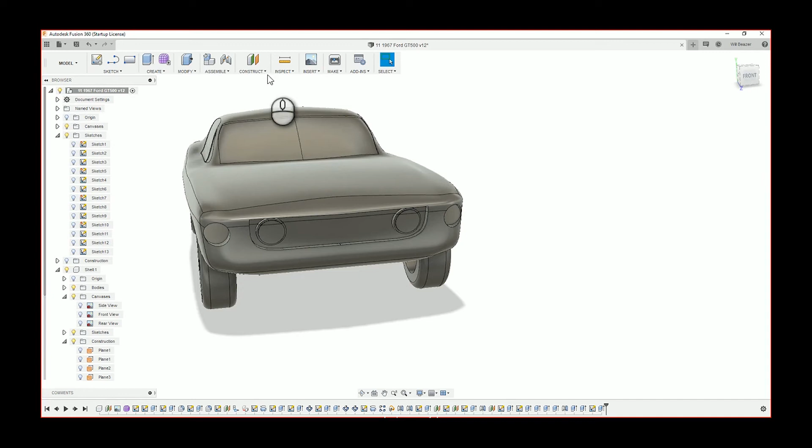Hello, and welcome back to what I believe to be part 16 of modelling a Mustang in Fusion 360.

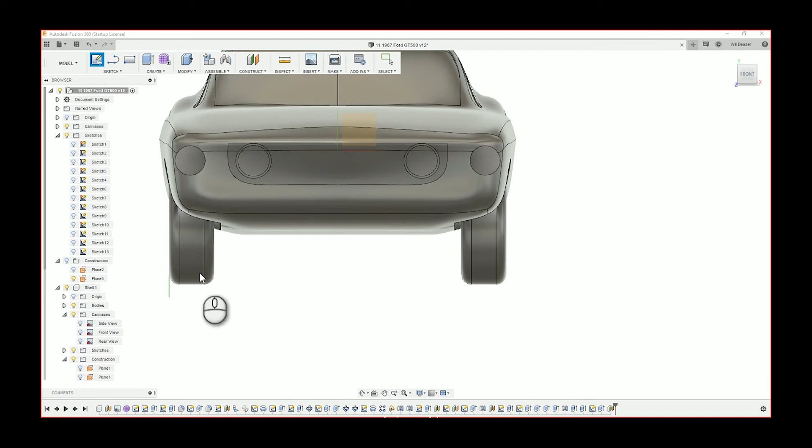So we're going to begin this episode with a standard bit of stupidity that I have since learned from. For some reason that I'm struggling to kind of come to terms with, I draw the headlights from side on. I should be drawing from this view that we're in currently, just because it would be a lot easier. But instead, I just decided to draw from side on.

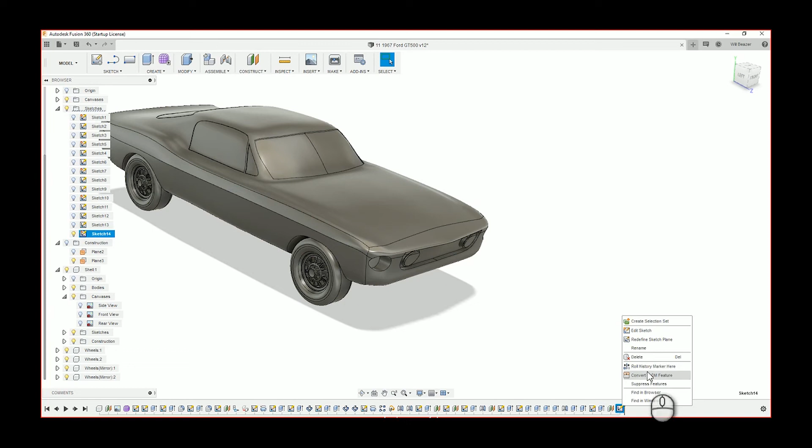What we're trying to create here are the little kind of dome headlights that fit in the sockets we cut out last time. So at the front there are kind of the central headlights, and then if you look close, there's those outer sockets we cut in. And if I decided to draw straight on from the front view, I could have just selected the surfaces that the cut extrude is done on as my sketch plane, and I could have drawn a very quick shape and edited that, no problem. But instead, I decide to draw it from side on.

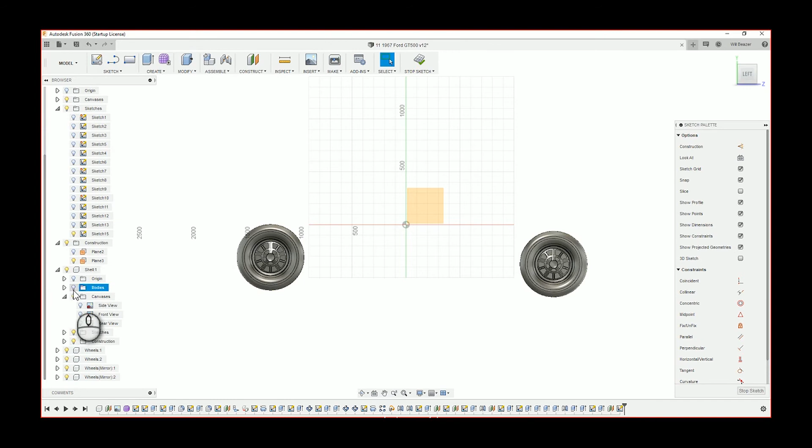So yeah, what I want to do here is I want to use that surface and project it using the project tool, which I've bound to the letter P, but you don't have to. Actually, I think that might even be standard. So now I have that circle shape, and what I want to do is create an axis, basically, for my sketch to revolve around.

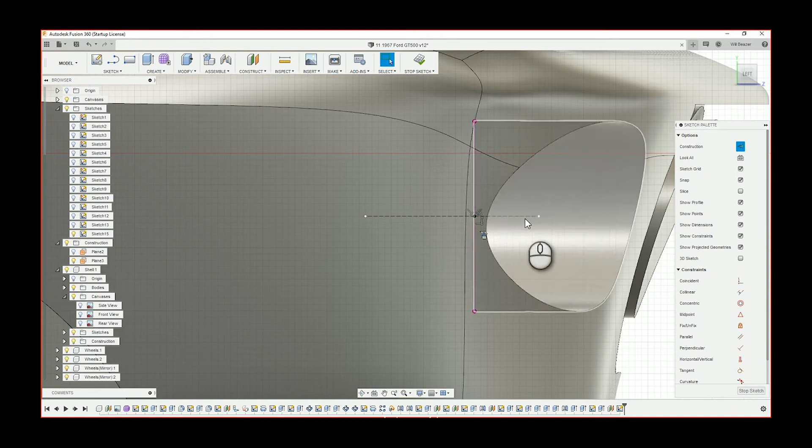A quicker way of doing this axis would actually be to go into the construct tools at the top and then axis through cylinder. So if you select that, construct axis through cylinder, and then select that circular cutout space there that keeps flashing, then an axis will automatically be created. But instead I've drawn a line and a profile, and I'm going to revolve it in this direction. I guess the one advantage of drawing it on this angle is it's quicker to edit how much I want the dome to kind of come out. But you'll soon see what I'm trying to do.

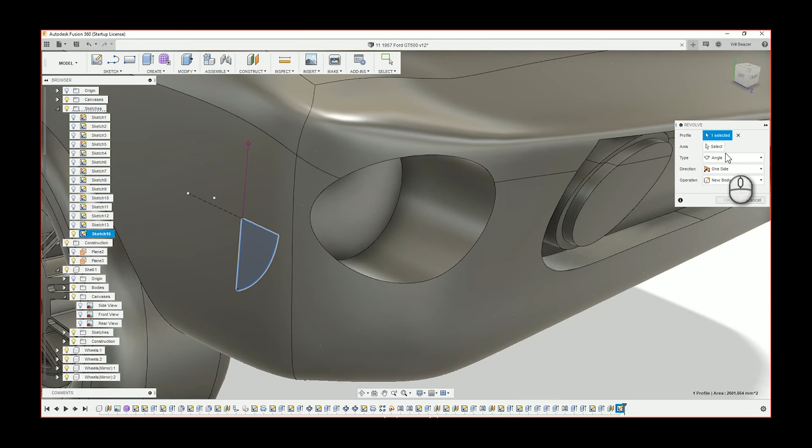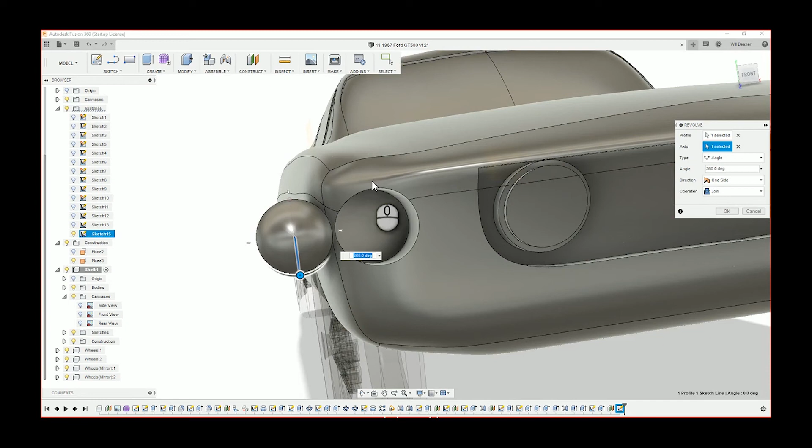Here, it's currently on the cut tool because obviously, I'm sketching on the wrong plane, and what I should really do is just go back and select the right plane. So instead, I click join, and yeah, I should realistically be changing the sketch plane before I do this, just because it might create more errors than are needed. So the plane that I actually should be sketching on, I created in the last episode right at the end, just by using the construct and offset plane tool to the middle of the headlight, basically.

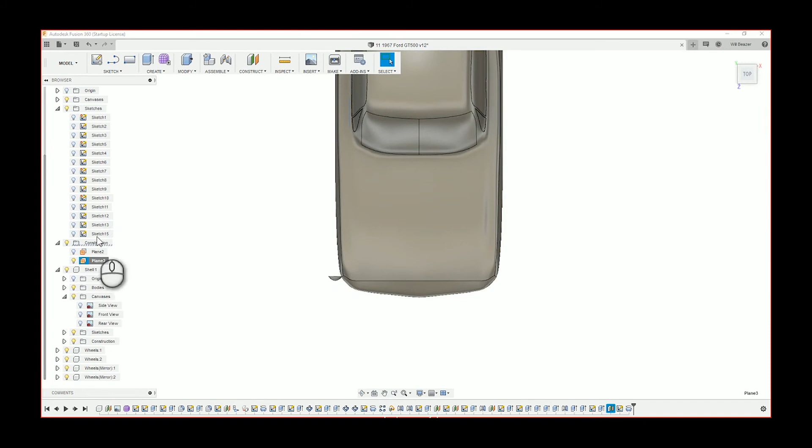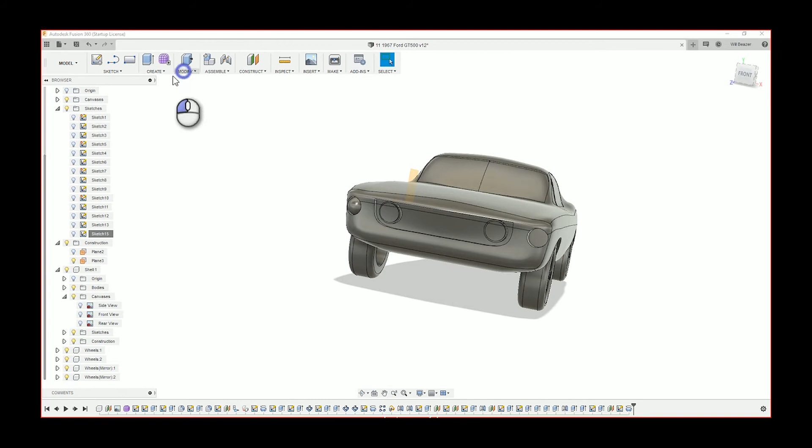So now, because I'm sketching on the wrong plane, I want to redefine the sketch plane, and then I want to find the sketch plane that I actually should be using. So I believe that's that one. And now if we come back to the front, there we go. Dome fits in the socket perfectly. So admittedly, the chronology of the steps I just did there was quite bizarre. I did end up with what I wanted to achieve, but I would not do it in that order.

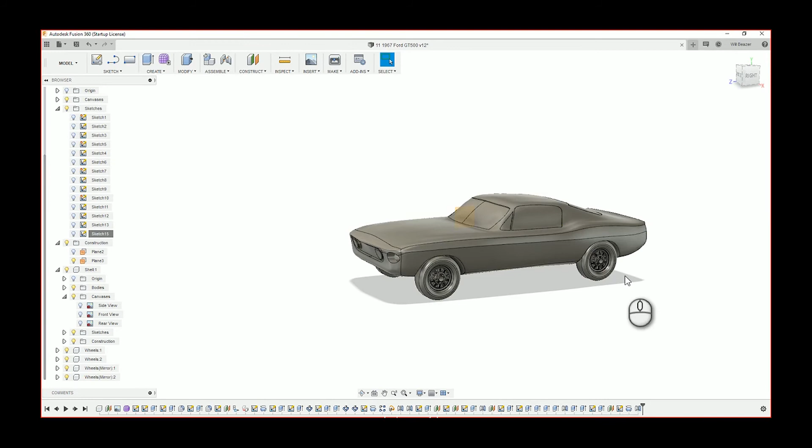So now quickly just mirroring the new feature across. It might be worth noting as well that usually it's easier to mirror features that are new bodies and not joined bodies, because what you can be doing is selecting the whole car and mirroring it, and then having two cars in exactly the same place. So what's it called, like overlapping geometry, and that can cause problems for things like CNC machines. So yeah.

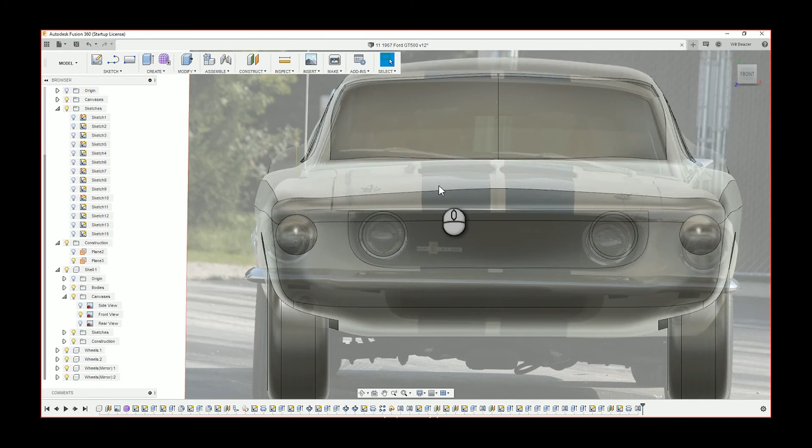So after a quick look over the car, I'm kind of deciding what's next to be done. So what I want to do is create that little air intake at the bottom. The reason why is because I know it's just going to be a simple, quick thing to get done. And I use a pretty similar process to what I did for the grille at the front. So I want to find a plane that's outside the car. You don't have to. I've just always found it easier to do it like that. So create a sketch, and then

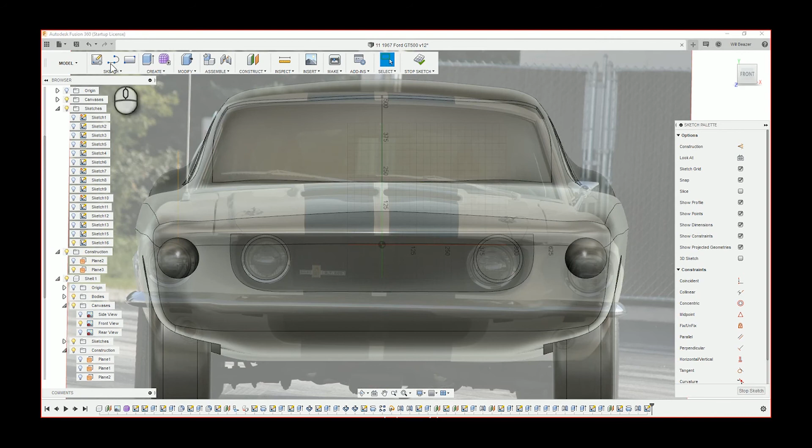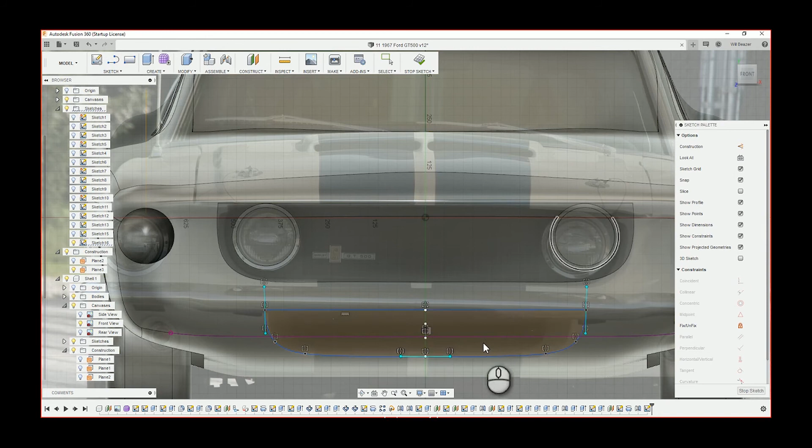using the line tool and the fit point spline tool, I'm able to create that shape. So I've only drawn it halfway because I want everything to be symmetrical. So then I'm just going to mirror it across. So select the sketch entities, mirror them to create one whole profile, like so. And you can tell it's a closed profile because of the orange glow when you hover over it.

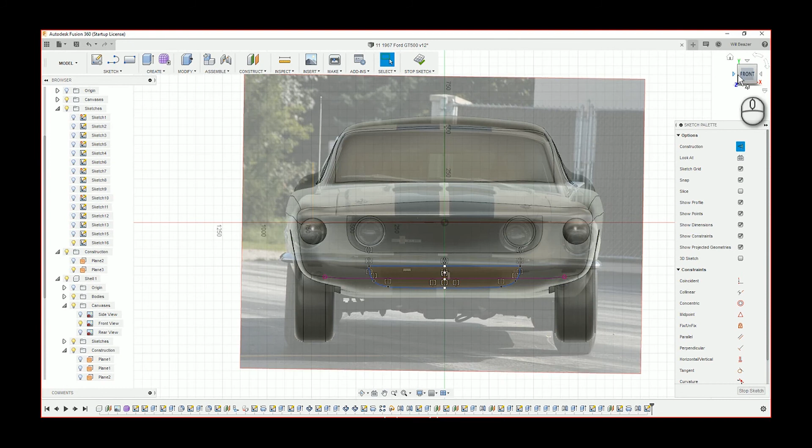So now what I want to do is extrude that into the body. I've projected that line from the body off of it as well, to do the same thing I did with the grille. So with the grille, I've got that kind of line that cuts through it near the top part of those headlights, and I had to do that because I wanted the way it extrudes to match the body. See from here, I've gone from object rather than extruding from the plane, and basically I wanted to make the air intake at the bottom consistent with the grille above it. So I'm using it off the body.

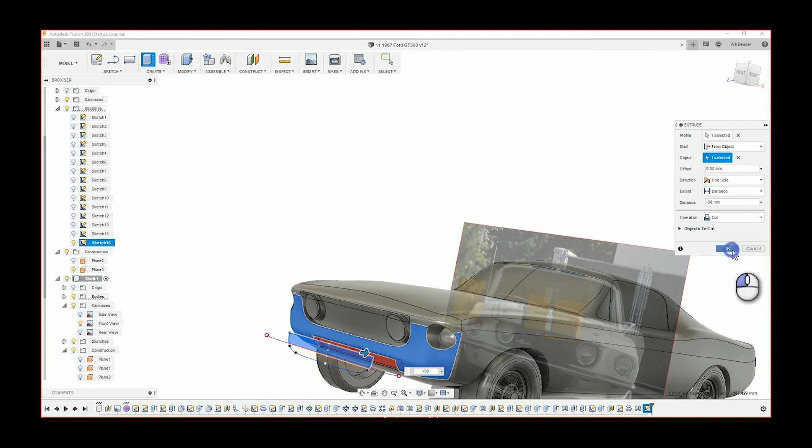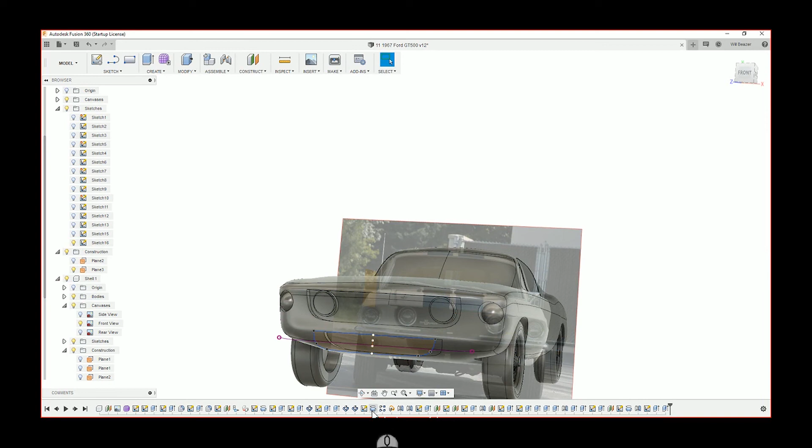Whereas when we did the kind of outer fog lights, headlights, whatever you want to call them, that was just a plain cut extrude. The start point wasn't from the body. It was just from the sketch plane. So you can see how the cut goes 50 mil deep, but 50 mil starting from the body, so it follows the curvature of the car. But I'm sure you'd have picked that up on an earlier episode, but just in case you weren't clear, there you go. That's the lower air intake done.

So I'm going to quickly hop into the display settings, click visual style, and then I'm selecting shaded, so that gets rid of all the lines. I want to see the Mustang without the black lines.

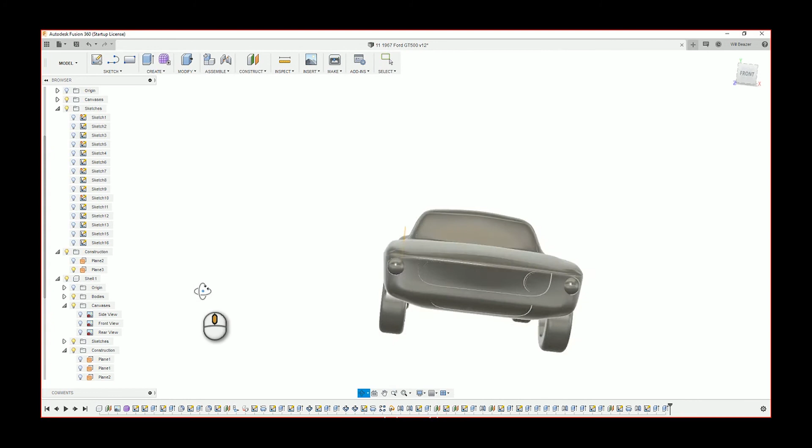Personally, I can't work in the shaded mode. I find it very frustrating to just work in this mode. But on fluid shapes like this car, I like to see how things are going by toggling the visual style between shaded and shaded with edges. Some people can work fully in shaded. I'm not one of them.

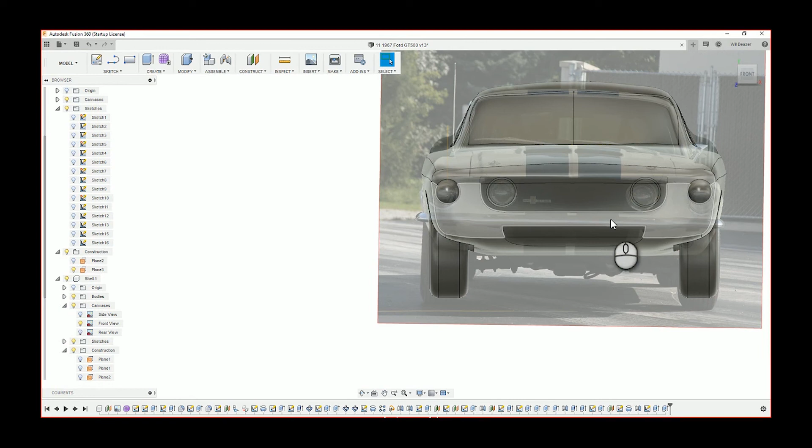So now we're going to move on to the bumper, the front bumper. I'll preface this by saying, partly down to how late it was in the work I was doing, because I did this all in the same day, I find this so difficult. It's not a difficult thing at all, it's a rather simple shape, but sometimes I think of how I would do things on SolidWorks, my previous program, and then I just try and do the exact same thing on Fusion. Sometimes that works fine, and sometimes it doesn't. In this case, it wasn't.

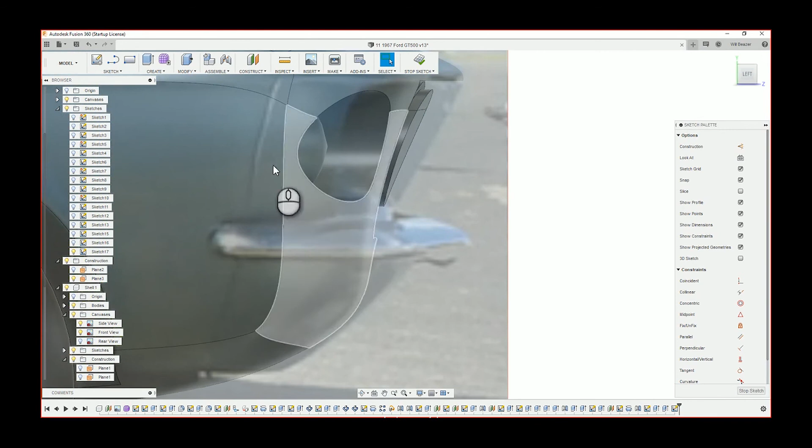This is a case of something that's obvious on SolidWorks, but it's only down to more experience on the program.

But there are a few ways you can do this. You could do this via a sweep or a loft feature. So what I'm doing is creating a profile of the center of the front bumper. Obviously I can't see the cross-section, it's impossible to know the exact cross-sectional analysis of the bumper unless you own one that you've cut in half. So that's just an educated guess for what the profile would look like right in the middle of the bumper.

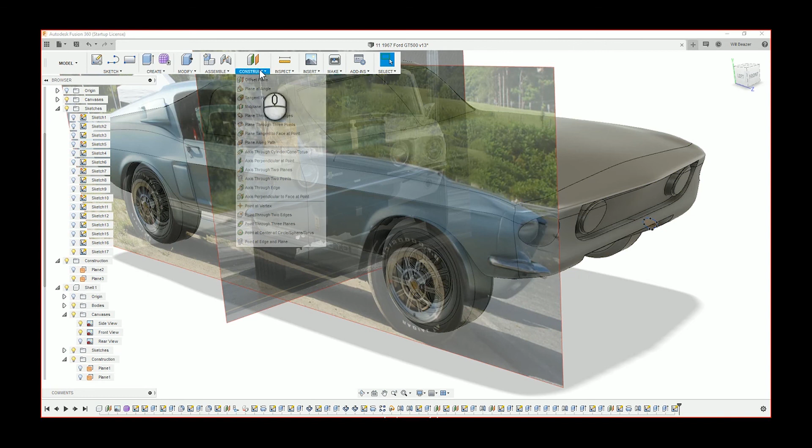And the same goes for the next sketch I'm about to do.

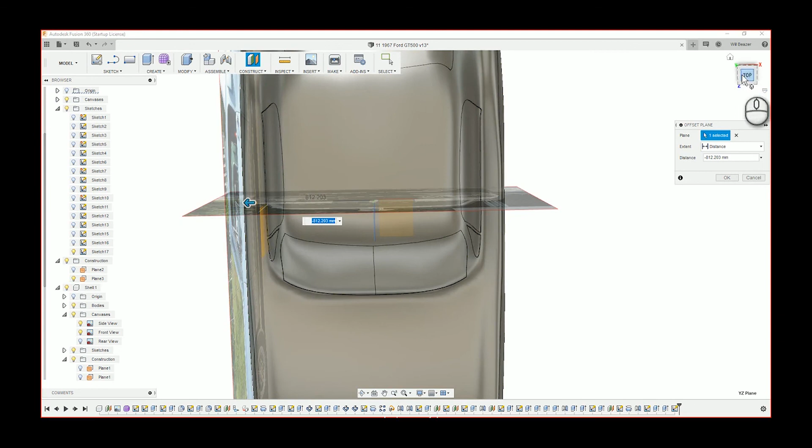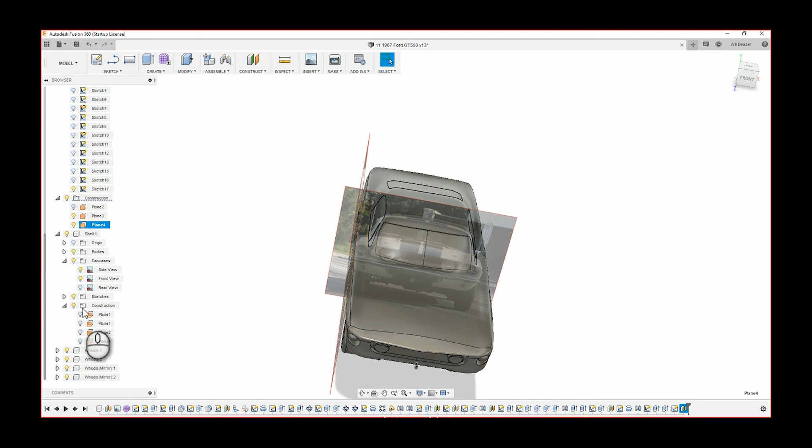So I've just created a new plane, well, almost created a new plane. Due to the large model, the plane is at first invisible. This is something that annoys me on Fusion, that they don't scale the planes up. So the planes are usually always the same kind of size when you create them. At first I'm thinking it's that plane, and then I'm going, no, it's not that one. But because this model is huge, and I'm working in millimeters on this program, and the car is like 2,000, 3,000 millimeters long, probably more than that, trying to find that plane can sometimes be very difficult.

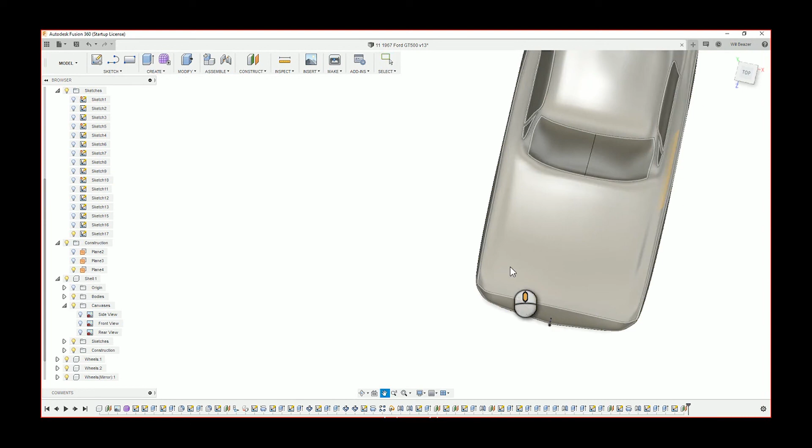One way you can get around that is if you turn off everything else, so you at least know the plane is switched on, and then click zoom to fit at the bottom, and it will zoom to your plane. But in this case, I didn't quite have to. Now I've got the sketch plane I want.

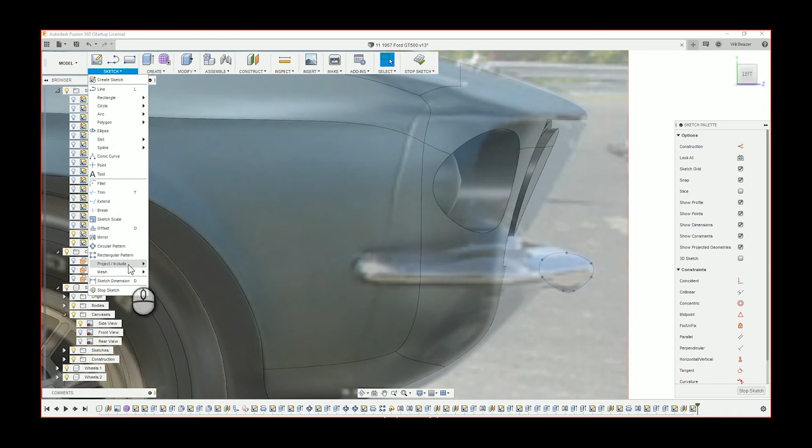Now I want to create a sketch. I want to turn back on the side canvas. So there we go. What I want to do now is the exact same thing that I did in the center of the bumper, have an educated guess of what the profile of the bumper will be, level with where I've created the plane. Again, this is impossible to know without figuring it out with exact dimensions or a user manual to the car. To me that looks okay, yeah, for now.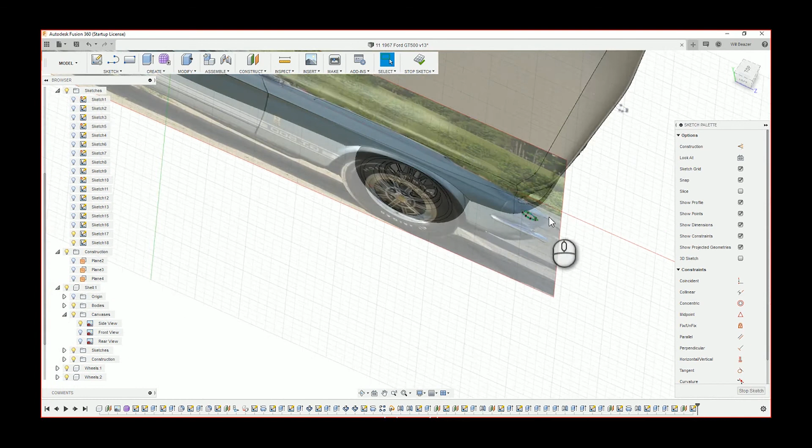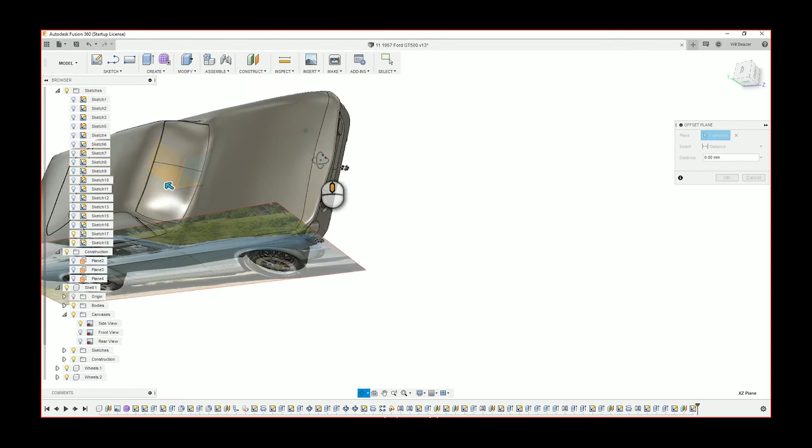This is the point at which I would much rather be using SolidWorks. In SolidWorks there's a tool called 3D Sketch, where you basically draw a sketch from one plane, then draw a sketch on another plane, and select 3D curve, and it creates a drawing that from the top down is the same as your top sketch, and from the front on is the same as your front sketch. So it creates a 3D sketch.

At the time, I just wasn't aware of how you did 3D sketches on this program. Even now, knowing how you do them, I'm not particularly impressed with how you would go about them. I find it's one of the features that does, I think it does need fixing, for Fusion.

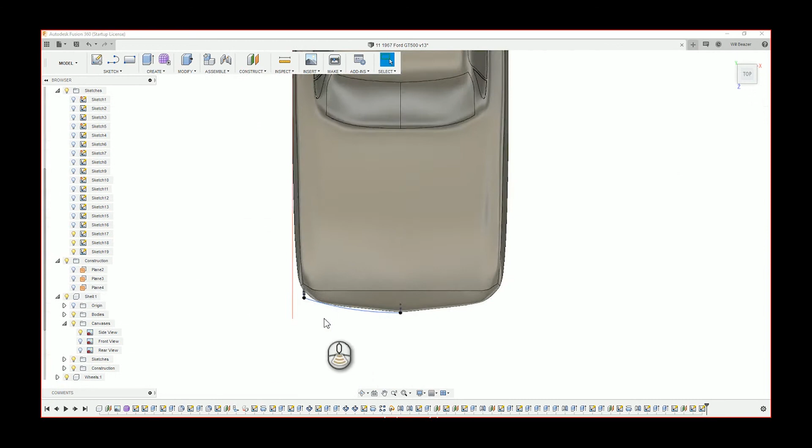But you can see I've tried to draw a sketch from one angle, and then I'm perhaps looking at drawing one from another angle, trying a sweep or a loft, and it's not going to work without that sketch being inside the two profiles. So it can't just be a sketch in two dimensions.

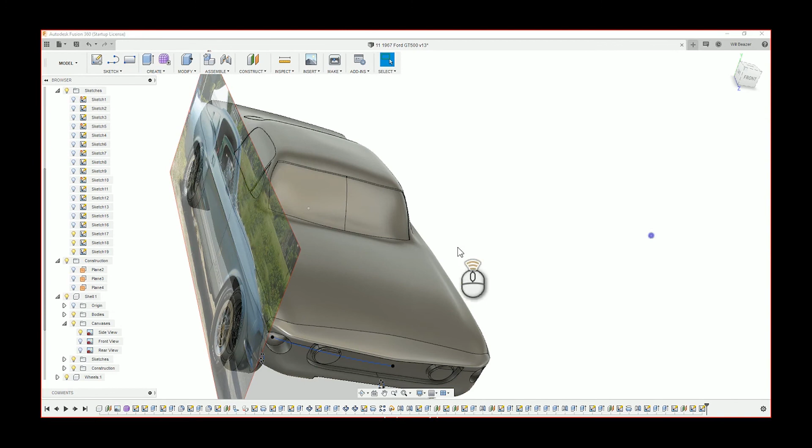The way you go about it, I now know, is you go into create a sketch from one angle. It has to be a fit point spline or any type of spline, and then you can adjust it once you exit the sketch by using the move tool.

But it's a little bit complex, and it doesn't feel very accurate. It feels like, I know you can dimension it, but it feels like you're eyeballing it. It's not a particularly nice tool. Anyway, the bumper takes me about 20 minutes in total, so I'm going to finish that one in the next episode.